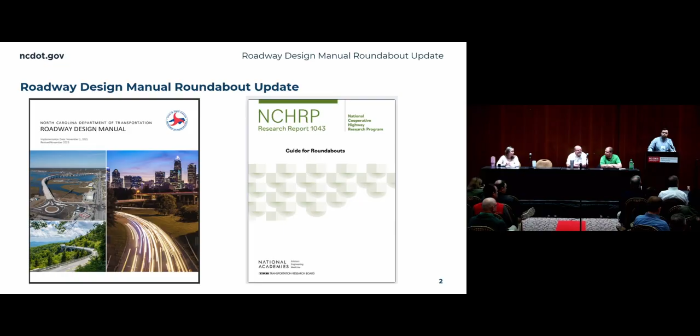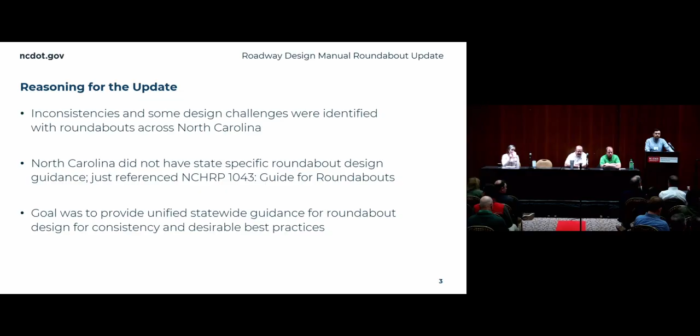That brings us to today, or in February we released the update where we've taken a little bit more guidance and gone a little bit more in depth. So what we've done is identify some challenges from projects throughout the state, as well as coordinated with other states, Wisconsin and Florida being two of them. We used that combined with guidance from 1043 to create the NCDOT roundabout guidance.

So what have we actually added? We've made changes to two sections. The first one, 8.2.4, this is an overview of roundabouts. And we've also made changes to 8.10, which is our design guidance.

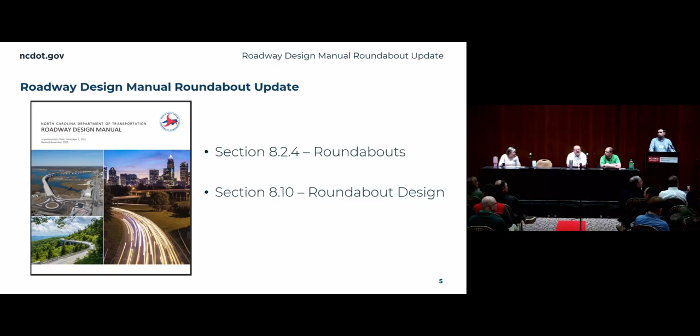So chapter 8.2 is our types of intersections. This gives you an overview of the different types of roundabouts. There are 4 of them. The first one, and kind of our default, is a single lane roundabout. The next one is a mini roundabout. These are going to be rural, typically smaller volumes, smaller speeds, and generally an upgrade from a 4-way stop.

The next one is a multi-lane roundabout. At NCDOT we're highly recommending a 2x1 as the biggest. If you find a location that you think a 2x2 would work, you're more than welcome to talk to congestion, see if you can get that worked out. But due to some challenges we've had with them in the past, we're highly recommending a 2x1.

The final type is a modular roundabout. Modular roundabouts are essentially plastic curbing that's put up very quickly. They're very cheap, very quick to put up. However, they do have some issues with the length of their life.

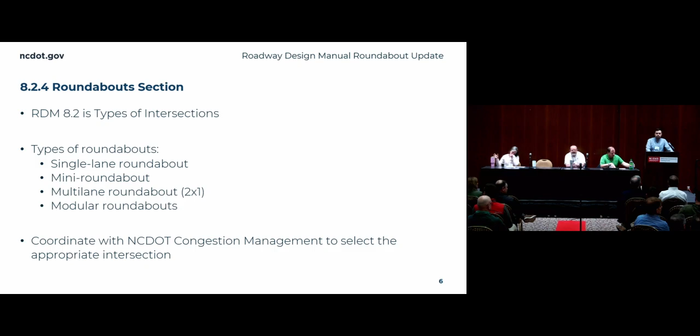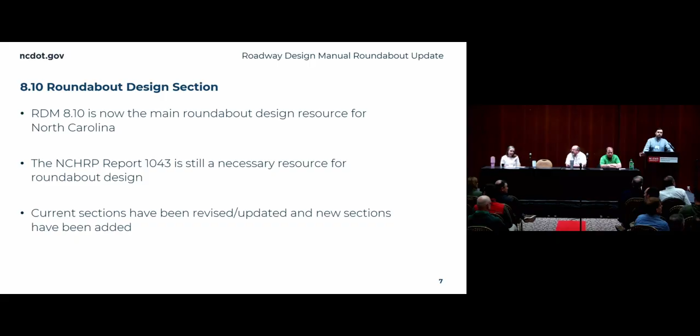So then to get into 8.10, this is our design section. This is not going to be the only design guidance you're going to need for roundabouts. You are still going to have to use the NCHRP report. However, our goal here is to orient designers with what we want you to do with a North Carolina look for it.

To get into that, it's going to start with the roundabout design process. What we mean by this is roundabouts can be optimized for whatever you need them to be. So what we want you to do is pick certain things you can optimize your roundabout for. We have a list of them up on the screen, but that's not all of them. We have speed control, pedestrian and bike accommodations, large design vehicle accommodations, high capacity, and right-of-way impacts. You should look at your project purpose statement, stakeholder input, your location, and any information you have on your project. Try to think about which of these would be most important for that location.

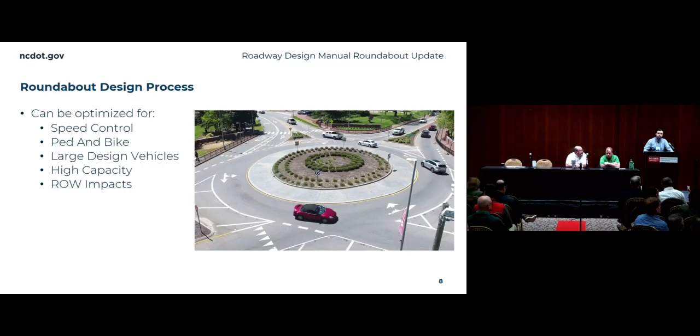Then, as you are making decisions and designing your roundabout, we want you to keep these important things in mind. There are a lot of decisions you can make that will give you benefits on one side and drawbacks on the other. So we want you to try to balance those decisions as you go through the design stages.

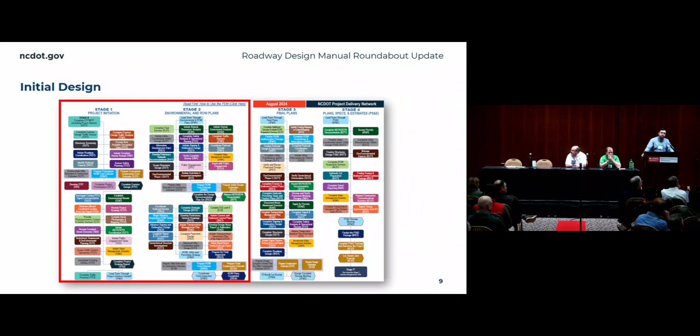Once you have your alignment set up, you need to look at your legs. There are 2 different types of legs: approach legs and departure legs. For your approach legs, we want to make sure we are slowing people down, so this means gradually decreasing radii on curves. And I'm going to say gradually again. We want to make sure we are not just putting a really sharp curve right there coming out of maybe a 60-mile-an-hour road.

Then for departure, we are looking to allow people to accelerate out of our roundabouts. We don't want to be putting chicanes on our departure legs. Something that goes hand in hand with those last 2 is going to be truck aprons. At NCDOT, we want to do our best to minimize truck aprons for pedestrian issues, which we'll talk about a little later, but also for cost.

Then you're going to lay out your bypass lanes, which are your right turn bypass lanes. Once we have all of that set up, we can take a look at our fastest path calculations. For anybody who doesn't know what a fastest path calculation is, essentially this is a line that we draw through a roundabout that represents theoretically the fastest somebody could drive through it.

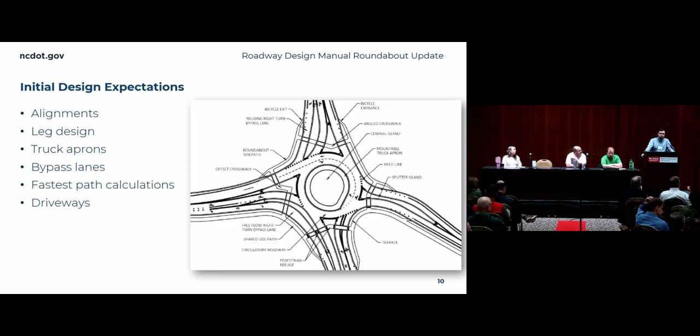Our next and final stage of guidance that we have added is our DRPS expectations. If you take a look at this section, you're going to see the words confirm, review, revise a lot. That is because, as we've said a couple of times now, roundabouts are very iterative. You're going to take what you've done in the first couple of stages, look it over, change it, see what you can improve, see where your weaknesses are, to try to get the best roundabout that you can.

Two things that we're going to add at this stage are sight distance calculations—that's your stopping sight distance as well as your intersection sight distance—and then we're going to add details for our islands.

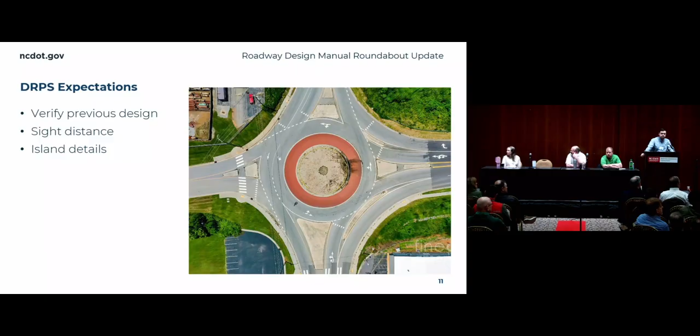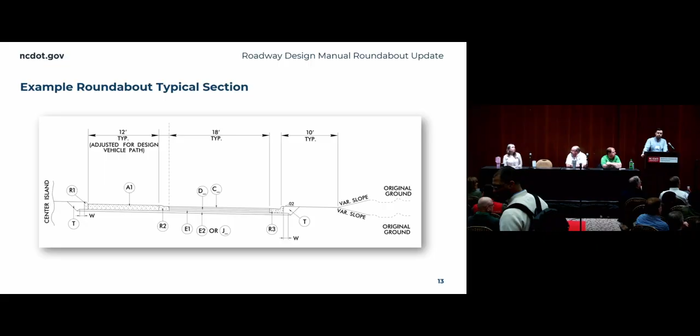Curb and gutter is the NCDOT recommendation for all roundabouts. The reason for this is curb and gutter has inherent speed control compared to just a shoulder and pavement markings. People are much more likely to ignore a line on the pavement than a physical curb barrier, and so for that reason we are recommending it. However, you don't have to put it on your entire corridor—you can put it on just the limits of your roundabout.

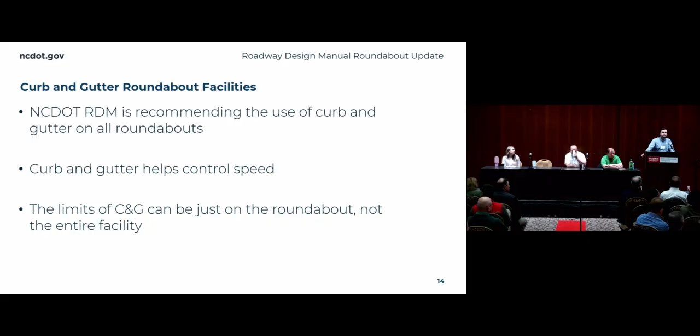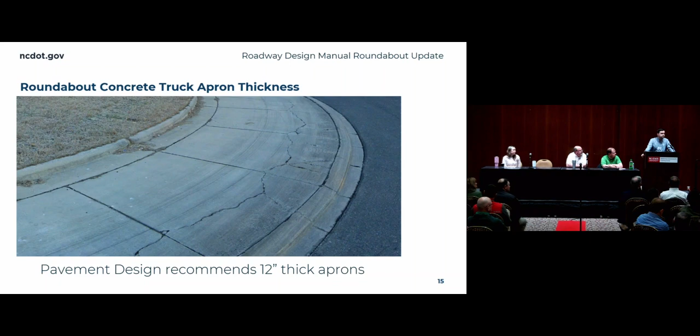So from about 6 months ago up until 6 months ago, truck aprons had been 7 inches to 12 inches in depth. But now pavement design is recommending they be 12 inches due to some of the cracking issues we have seen on truck aprons.

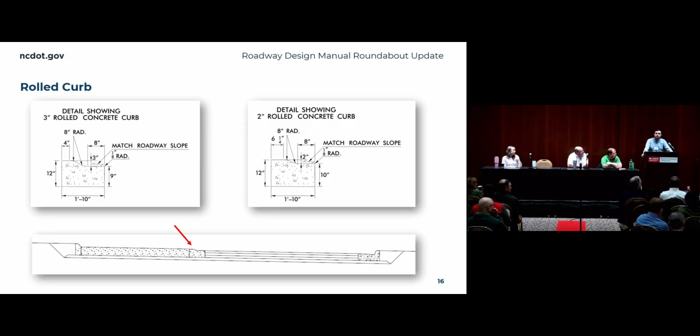We're going to highlight there are 2 types of rolled curb here: a 3-inch rolled curb and a 2-inch rolled curb. The 3-inch is going to be our standard, and the 2-inch is generally going to be used when you have higher low-clearance traffic, something like low boys. The other thing I'll highlight is that the left-hand side of these rolled curbs has that 12 inches to match up with the depth of our truck aprons, and the other side is going to be 9 inches or 10 inches, depending on which one you are using.

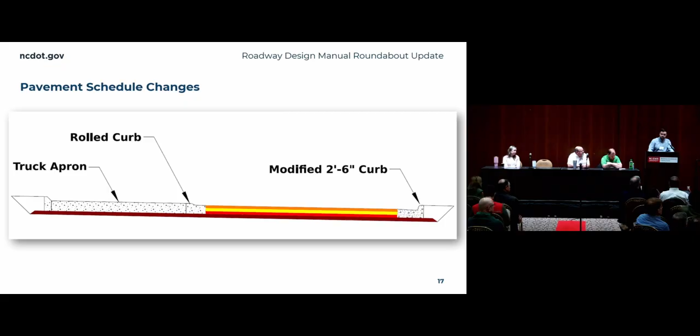Now, as you may have guessed, we have changes to all of our other curbs. So this is our change to our 2'6" curb, going from the 7-inch face to the 9 and 10-inch face.

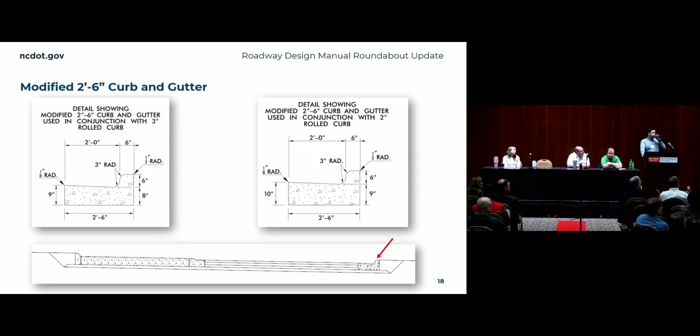So we do not want to run these modified curbs and pavement schedules throughout an entire project. We want to make sure we're stopping them somewhere around the limits of the roundabout. Exactly where you stop that is really case by case. This is a good thing you can coordinate at a field inspection meeting, so talk to your division and construction staff to see where they'd like to end it.

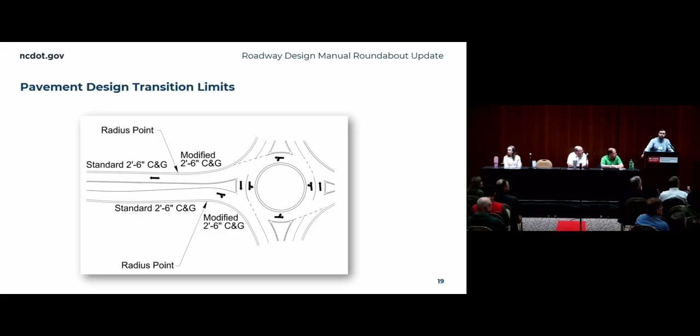And the final typical section thing I'll talk about today is truck aprons. As I said before, there are some pedestrian concerns with truck aprons. If you're a pedestrian, you see a sidewalk and another sidewalk in front of that. So if you as a pedestrian are waiting in the truck apron when a truck approaches, there is a conflict there, and that's something we want to try to mitigate.

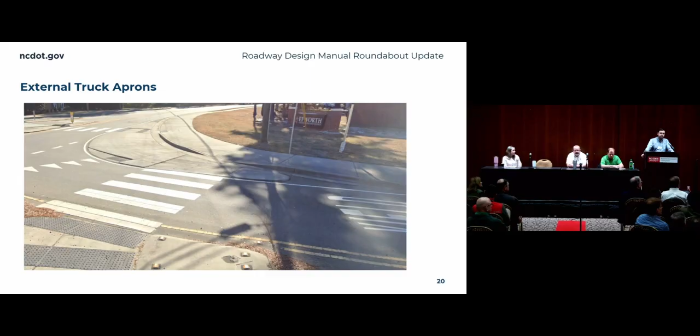One of the easiest ways to do this is to not have these truck aprons at all. They're expensive and they have that issue, so we are trying to do our best to minimize truck aprons. You can take a look at this and mess with your approach legs, and that can generally help you accommodate larger design vehicles. And with that, I'm going to pass you over to Lily to get a little bit more into the design.

All right, so what we have learned through developing this guidance is that designing a roundabout is a bit of an art. You're constantly trying to balance the core design principles, which are balancing speeds, promoting visibility, guiding drivers, and accommodating large vehicles, and then wrapping all of that up together into one design and making it work as a whole.

So for example, having larger entry radii might make your truck movements a little smoother. However, in turn, it will make the operating vehicles enter a little faster, which can create unfavorable scenarios for pedestrians. So you really have to consider the trade-offs behind each decision that you make.

So we've added new subsections to the roadway design manual to help designers understand these fundamental design principles, including the location and shape of the roundabout, vehicle capacity and lanes, speed control, speed consistency and fastest paths, entry angles and vehicle path alignment, and sight distance.

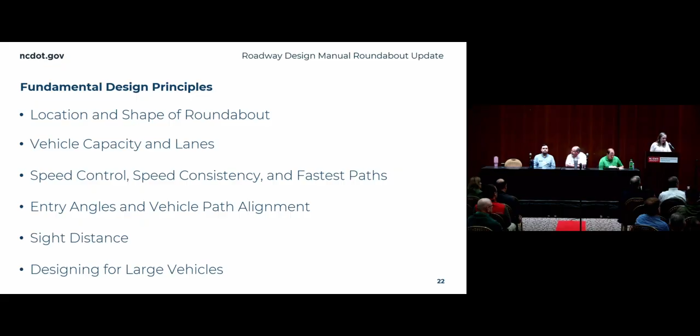And so the designing for large vehicles section also got an overhaul. We removed some information that we felt was best covered by NCHRP 1043, and we have added some additional information about truck aprons based on feedback from pavement management and the divisions. We have also added some information on how to design accordingly for truck-heavy locations.

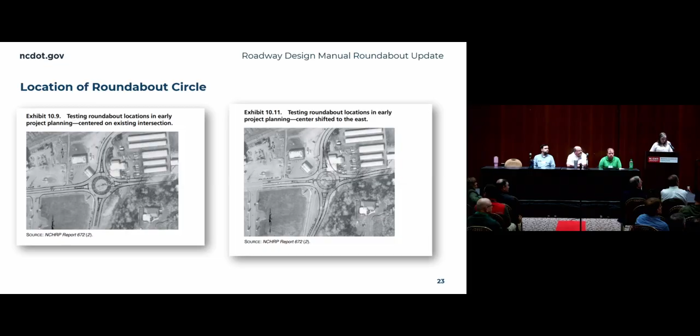So for roundabouts on higher speed facilities, you really want that driver to begin slowing down ahead of time before they reach the circle and then enter and circulate through that roundabout, because otherwise they will be going too fast. Unfortunately, posted speed reductions alone are not effective.

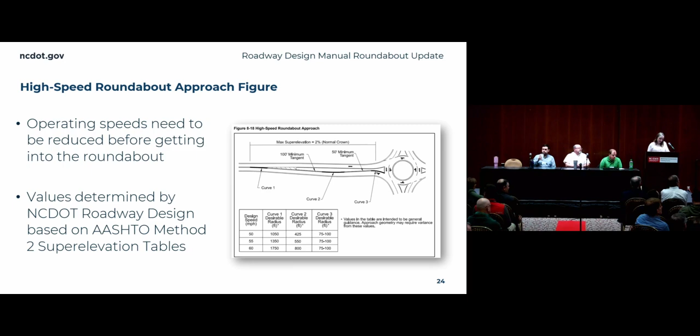So now let's go through an example using this high-speed roundabout approach figure. I'm going to say that my facility entering here has a design speed of 50 miles per hour, and I'll just use the values from the tables here. Let's say I selected my first curve, having a radius of 1,050 feet, and then that 100-foot tangent. Curve 2 would be 425 feet, then a 50-foot tangent, and a selected value of 100 feet for the last one. So you can see on a high level, overall, these radii are getting smaller over time, reducing the speed of that vehicle coming into the roundabout.

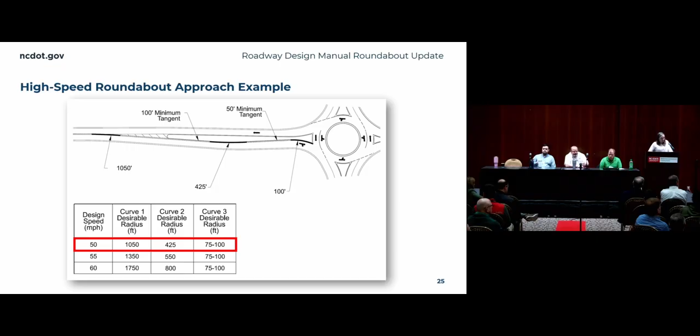We wanted to mention that ultimately this methodology was included as a best practice, so these are recommended values. If your project and conditions dictate that you use something else, that is okay. This example is also for a tangent approach, so curved approaches or other project conditions may lead to different values to achieve that speed control.

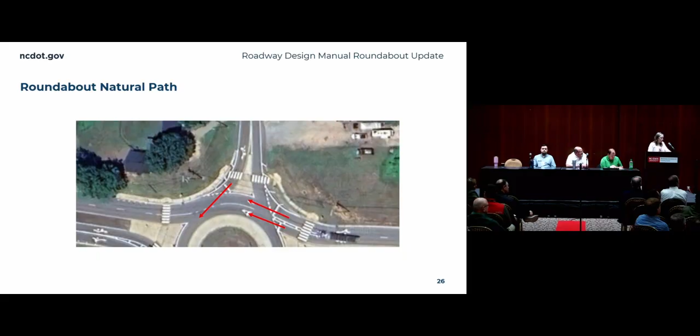From there, you can begin adjusting things like the entry, the splitter islands, or the central island to help how those vehicles are tracking. This is particularly important for 2x1 multi-lane roundabouts, where that correct lane choice needs to be clear early on.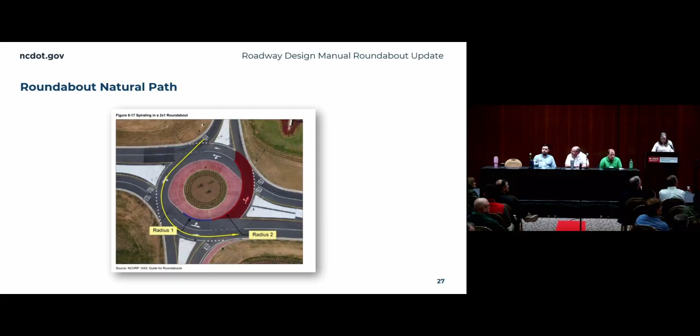Roundabouts require 4 different types of stopping sight distance checks to make sure drivers can see what they need to at different points in the roundabout and stop if necessary. NCHRP report Exhibit 9.12 through 9.16 depict these different checks. You need stopping sight distance on the approach, at right turn bypass lanes, at pedestrian crossings, and around the circulatory roadway. We added references in our guidance to these exhibits to help draw attention to them and how they lay out where on your roundabout and approach legs you actually need to calculate that stopping sight distance from.

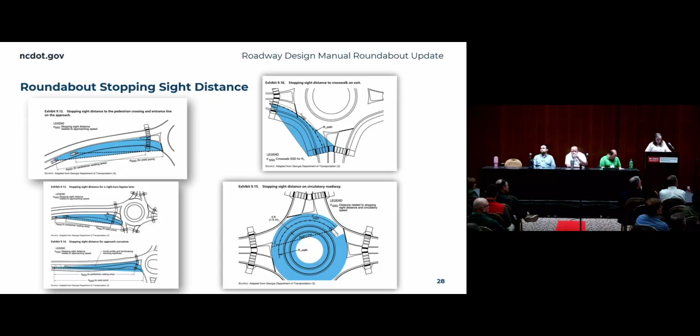After talking through those 4 stopping sight distance checks, let's talk about our intersection sight distance checks. There's only one figure for those, shown here, Exhibit 9.17, which tells you that intersection sight distance needs to be calculated both at the yield line as well as 50 feet ahead, so that drivers are not waiting until the last second to see the circulating traffic.

We also added a reference to this exhibit in our roundabout guidance to draw attention to this figure and the associated formulas.

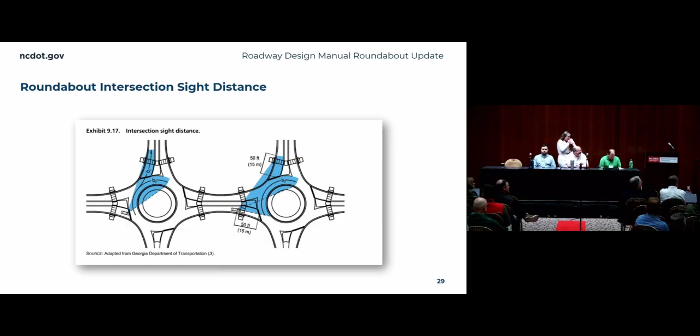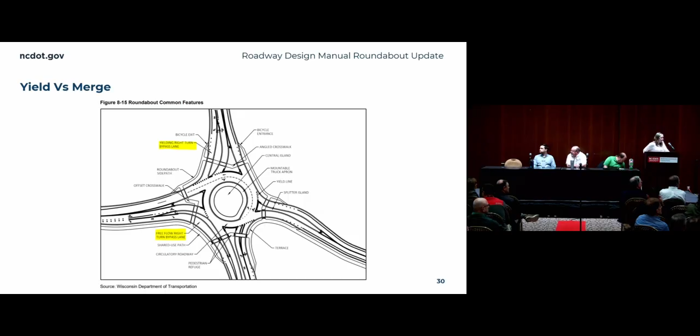If you would like to have a merging bypass lane, it's critical to ensure you have enough side-by-side parallel length for the driver to merge comfortably.

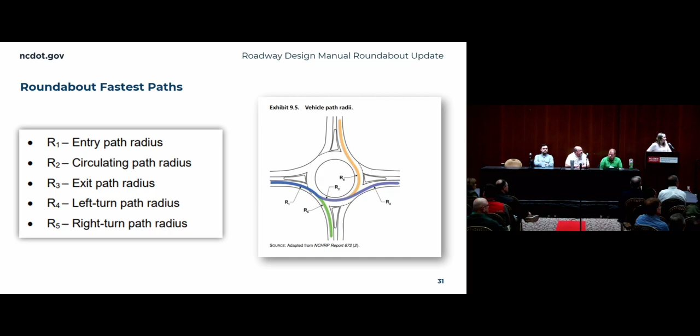Unlike a yield or merge condition, where the driver may be stopping or slowed before entering the roundabout, drivers who can enter freely can bring a lot of speed into that roundabout if the geometry allows it. This is why fastest path is so important. As mentioned earlier, fastest path is just a computed version of each movement, the fastest theoretical speed a driver is able to go. One important concept is that you're checking each movement not just to ensure speeds aren't too high, but also consistent among each other. This takes multiple iterations to get right, but it's a very critical element of roundabout design.

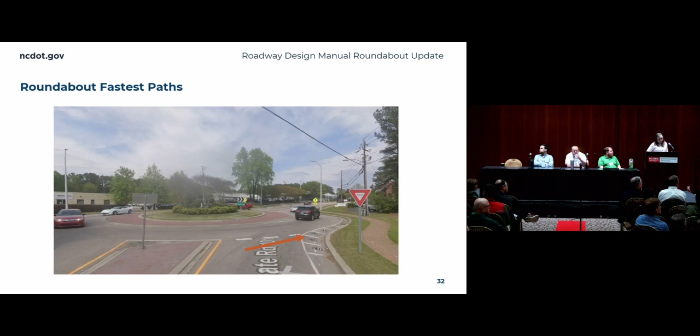The roundabout drainage guidance was updated to be in line with current NCDOT hydraulic guidance. Since roundabouts are lower speed environments, your spread and hydroplaning concerns aren't going to be as bad. Your drainage still needs to work well, however, be careful of over-design. A big point in the roundabout drainage guidance is to keep those drainage structures off the vehicle path, especially on the inside of the roundabout.

The better place for inlets is usually along the outside curb of the approach leg before the driver reaches the yield line. This is also a good place for coordination. If you're the roadway designer, you may do the geometry, get the drainage design back from hydro, and see a box show up right where the driver is going to drive over it. That doesn't automatically mean anything was done wrong, and sometimes you just can't avoid it. But it's still worth working with hydro to see if the geometry can be adjusted enough to get that structure out of the vehicle path.

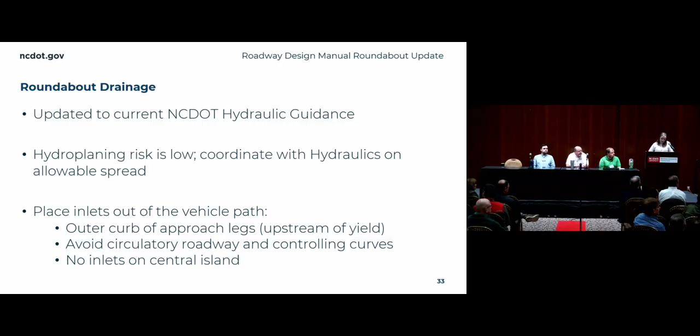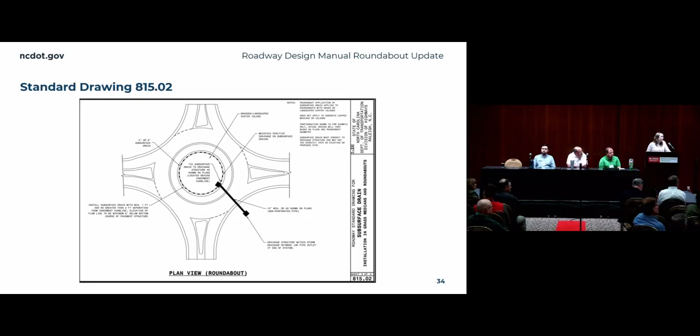Here's standard drawing 815.02, the subsurface drain for installation in grass medians and roundabouts, which was added to the 2024 standard drawings. This is the standard to look at when you have a roundabout with a grass central island that needs drainage. The main benefit of using this is to make sure you're keeping the center of that roundabout draining well and not creating a big muddy maintenance issue.

Usually your interior truck apron is enough to accommodate trucks in a roundabout. But in higher truck locations, like an interchange roundabout with a nearby truck stop, exterior truck aprons may also be needed. This is something designers are running into more often as roundabout interchanges become more common. Truck aprons and geometry adjustments help make room for larger vehicles while still keeping the roundabout doing what it's supposed to. Accommodation should always be based on the design vehicle for your project. There are many different large vehicles with different swept paths and design considerations that need to be focused on specifically.

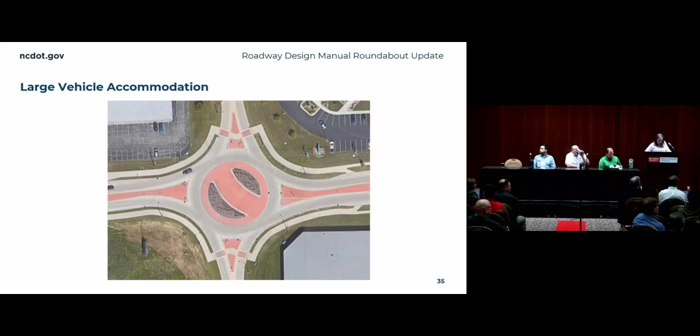The Roadway Design Manual is a living document, typically updated every May and November, and in this case, February for the roundabout version. This was the first enhanced NCDOT specific roundabout guidance, and we have more roundabout specific updates expected in May. So if you have any feedback, lessons learned, or general experience working with roundabouts, please reach out to us and share. It would help us a lot as we continue to develop this with the industry's help. We would love to help review and consider your feedback into future updates.

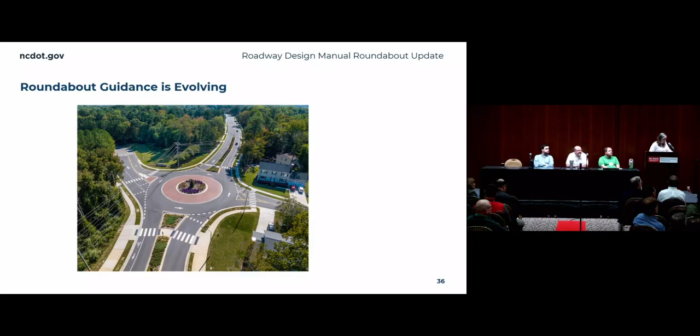Any comments you have for the Roadway Design Manual can be submitted using the contact form on the Roadway Design Manual website shown here.

Good morning, everyone. My name's Ken Thornwell. I'm the State Work Zone Engineer for the North Carolina DOT, and I'm going to chat a little bit more about roundabouts from a phasing and constructability perspective. I'll talk about some of the challenges we have when they go to construction. Then I'm going to change gears and give some updates on positive protection in work zones. I'll focus heavier on portable concrete barrier, but touch on the updated Code of Federal Regulations that was passed last year, and wrap it up with some information on crash cushions.

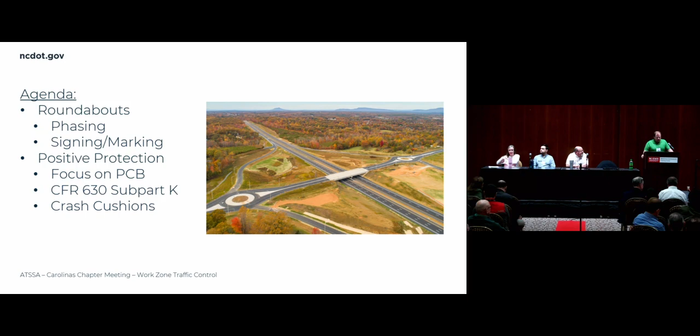But anyway, going into the roundabout construction. When we go to build a roundabout, traffic control really becomes the name of the game. Throughout construction, we have to keep people pointed in the right direction. Patterns change. Users, whether bicycles, vehicles, trucks, or pedestrians, we have to change their paths during construction. The goal is to keep them comfortable getting from one phase to the next until that permanent pattern is complete.

Some of the big challenges when we go to construct them: number one, alignments. The alignments will change during construction, probably more than once. The lane shifts and tapers need to be designed in accordance with MUTCD and North Carolina DOT standards, giving drivers great channelization with our drums, cones, and skinny drums so they understand which way we want them to go.

The superelevations, I heard Lily and Ty talk about superelevations. Superelevations in work zone traffic control cause us headaches a lot of times because it seems like every single time there's a superelevation to the left, the permanent design wants a superelevation to the right. Doesn't sound like a big deal, but it can be hard to construct. So as we're wedging that pavement, or milling, or whatever needs to happen, we need to make sure we're maintaining positive drainage, not getting bird bath conditions during that construction period, and that our design speeds are acceptable as folks come into these changed superelevations.

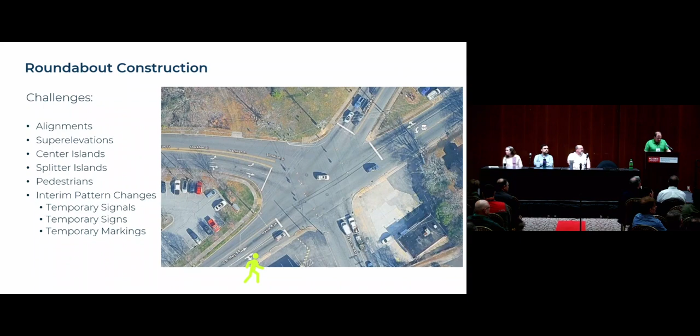As we go through construction, we've got a signal at this intersection here. At some point when it becomes a roundabout, that signal needs to come out. But in the interim pattern, while we're building that roundabout, that signal is very much in the way. So we need to build a temporary signal to get the poles and span wires out of the way so roundabout construction can continue.

So same intersection here. This is the public hearing map for that intersection, and that just makes my brain hurt. From a traffic control perspective, where do you even begin? What do we build first?

You can see that there's a lot of construction happening outside of the existing pavement. So what do you build first? Where do you put things like your temporary signal poles? Where are you going to put the pedestrians during construction?

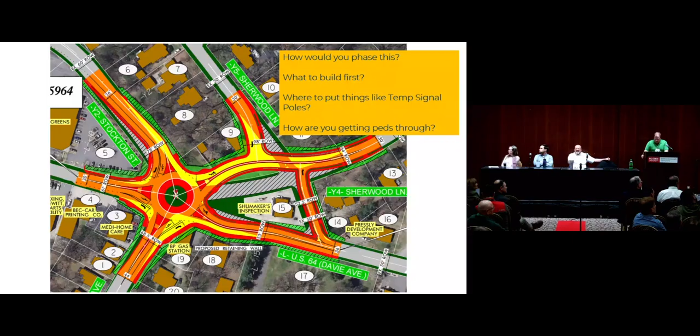These are the kinds of things that we need to include on temporary traffic control plans, because these are the things that are going to make it easier for the pedestrians to get through, for our bicyclists to get through, and then for our contractors to know what they need to build and at what point during construction they need to be installed.

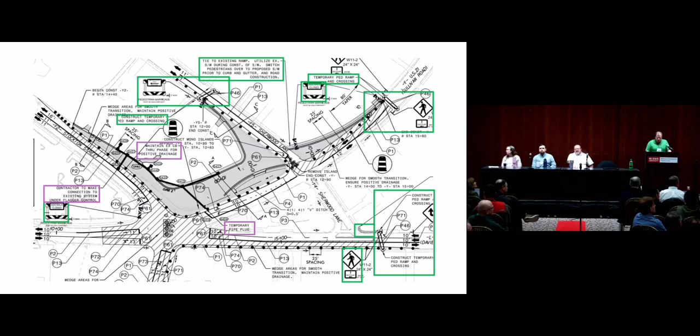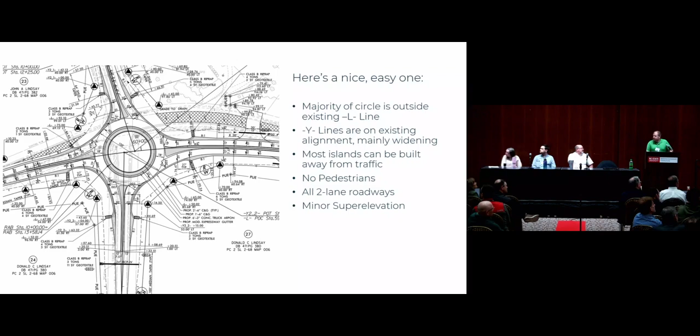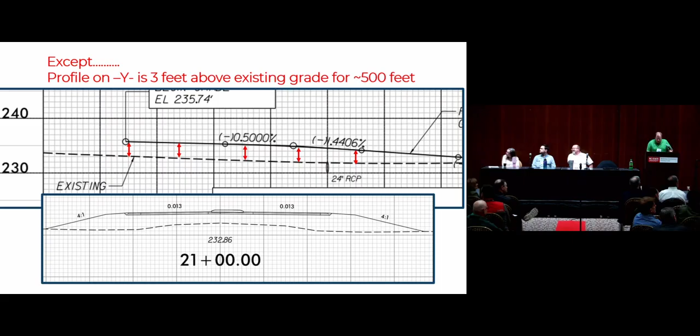The Y lines are pretty much on the same alignment. The islands can be built away from traffic. There's no pedestrians out here, 2-lane roads, minor superelevation changes. Everything looks wonderful until I pull up the profile, and it's 3 feet in the air for 500 feet. Hey, it's better than cut.

So the only way to build that approach on the bottom there was under full closure. The challenge we have there is that full closures - this one in particular - was not identified very early in the plans. It was identified a little bit later, so we didn't have quite as much time to do all the things we have to do for a detour, right? Work zone traffic control, I fully support closing every single road as much as possible to do the construction. We'll talk about that when we get into positive protection.

But we do have to do some things before we just close the road. We need to analyze the traffic routes and the detours, make sure that the detour route can handle the additional traffic volumes, that we're not going to have issues at traffic signals or railroad crossings, low bridges, weight-restricted bridges, making sure the pavement surface along that detour route can actually handle the traffic, make sure we don't have to do any widening for turns or anything like that. So there is a little bit of analysis that has to be done on that detour route. It's not as simple as just close the road and send the cars around.

Even if the roads themselves and the intersections are okay, we still have to coordinate with our stakeholders. We have to check with our division folks to make sure they're comfortable with it - our emergency services, schools, local governments, utilities. Just had one come in the other day where we were possibly proposing a closure, and Duke Energy said, well, hold on now, I need to get my giant trucks in and out because this is a staging yard where we keep all of our telephone poles. So I don't even know what design vehicle that would be, but it's a very, very big one.

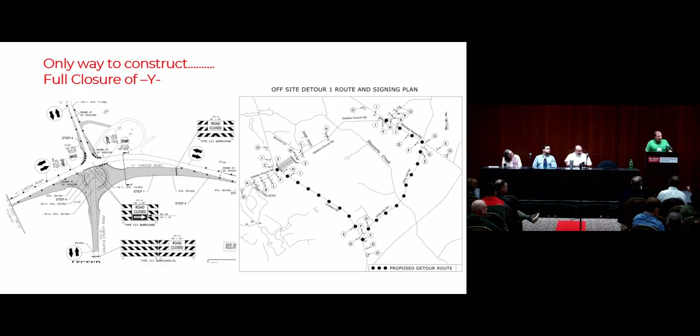And then once it actually goes to construction, we need to make sure that the plans have everything they need, because when that road gets closed, if we need to make changes because signs weren't included or we didn't have what we needed in the plans, sign fabrication could take several days, sometimes even weeks. So if we need to make a change, it might be a week before that change is actually implemented in the field. So all of that to say, if we're going to close the road to build the roundabout, fully support it - just make sure that we plan it accordingly.

Other things during roundabouts: interim pattern changes. So when we build a roundabout, a lot of times we have to work on multiple legs of the intersection at the same time. Sometimes that means that we can't keep every lane open that's out there today. So if we have to do turn lane closures or through lane closures, we just need to make sure that we're mitigating those impacts.

The situation here, I think part of it was the roundabout construction, part of it may have been some drainage items that they were trying to install, but we ended up having to close a through lane for a long duration, and immediately, the very next day, 2 miles of queuing, and every single day after that, 2 miles of queuing. So this is another situation where, with some level of traffic analysis, if we could have identified this earlier in the plans, we may have been able to put some intermediate contract times on this to make sure that the contractor gets these items completed quickly.

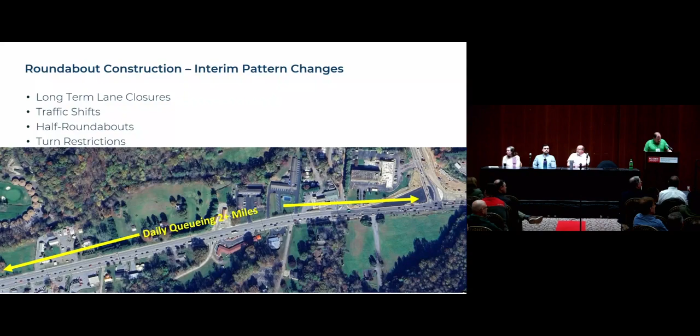Again, it just kind of boils down to making sure that we have the signings and markings in place to make sure that drivers understand what we expect them to do.

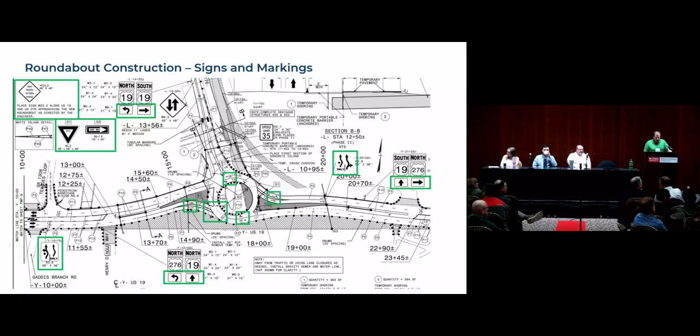So if the permanent sign can't go in, then we need to show that sign as a temporary sign on the traffic control plan, so that way the traffic control contractor can order those signs and have them installed on temporary supports.

All right, so I'm going to change gears a little bit. I'm going to go into some positive protection stuff.

So positive protection, basically any device that we put on the road to redirect vehicles and keep them from running off the road, hitting workers, running into a ditch, hitting a bridge pier, whatever the case may be. The most common, the most well-known are probably portable concrete barrier - that's what we see on most of our major projects. And then also truck-mounted attenuators.

A couple of things that we had to do, and I'll get into this in a minute, but some key definitions here: high anticipated operating speed - North Carolina DOT defines that as 45 miles per hour. And then no means of escape - so when workers have no means of escape, that means that they do not have an unimpeded path at all times. So these are going to become important in just a minute.

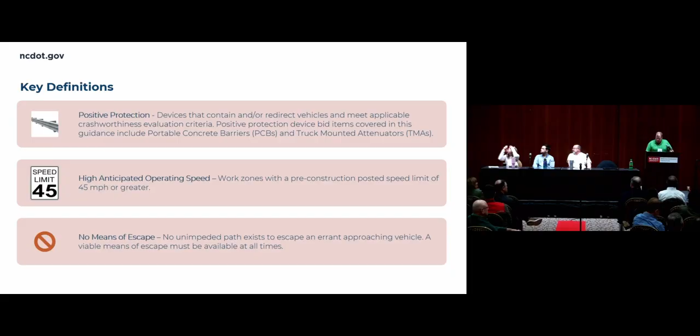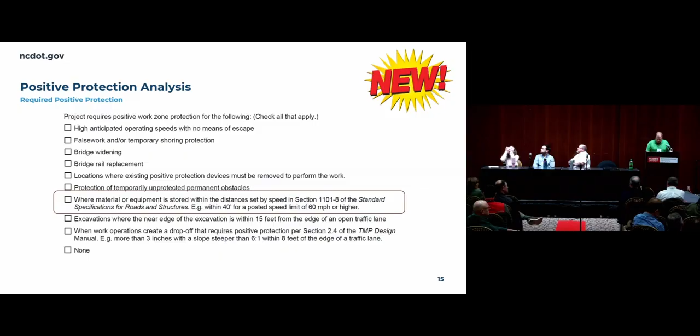So as part of this update to the Code of Federal Regulations final rule, we have a positive protection analysis guide that we'll be issuing some training on later this spring. There's a whole list of items in there for when positive protection may be used. But the big thing I like to say is yes, positive protection.

When a vehicle strikes positive protection, the benefit is that it's a controlled collision. Positive protection devices are crash tested. They're deemed as safe, or majorly safe, I don't know how to say that.

But the problem, or the risk, is that when we put concrete barrier down in 70 miles of I-95, we are going to increase crash frequency. That is a known fact. When crashes occur, it's going to take longer for tow trucks, police cars, and ambulances to get there. It's going to increase the likelihood of a secondary crash.

Positive protection is also going to cause issues with drainage, sight distance, it restricts oversized loads, reduces access for the contractor to get in and out of the work area. And there is tremendous worker exposure to install and remove it, especially if it's anchored.

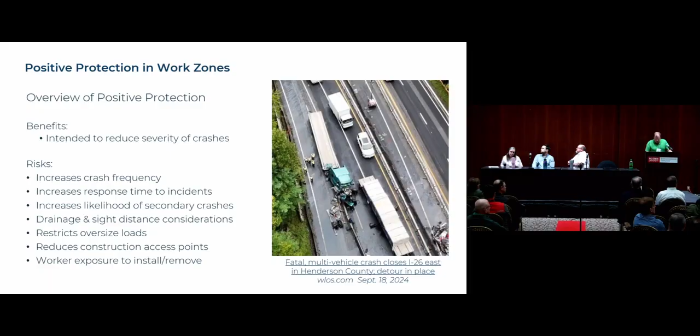So the soapbox that I like to carry around with me is: yes, positive protection reduces the severity of crashes, but it does have the potential to kill people itself. So the big takeaway here is that we want to minimize the use of positive protection, either by getting the traffic away from the work or getting the work away from the traffic. That's the message I like to take home - if there's an opportunity to not use positive protection, let's not. If we have to, then we will.

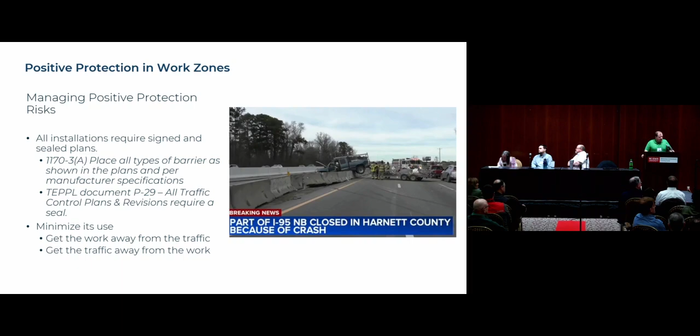Basically, the long and short of it is that if those three things are true - high operating speed, which we have defined as 45 miles per hour, workers have no means of escape, and it is a federal aid project - if those three conditions are true, Federal Highway says that you shall use positive protection unless you do an engineering study to eliminate it.

It sounds like a big change, but in reality it's not. I can't think of a single project in the state of North Carolina right now that would require positive protection based on this rule that doesn't already have it. So we're doing a great job there.

The big change, though, is that if you choose not to use positive protection for whatever reason, the federal requirement now does require an engineering study. So there's actually like a 10-page engineering form that has to be filled out, and somebody's got to sign and seal it and include it in project documentation.

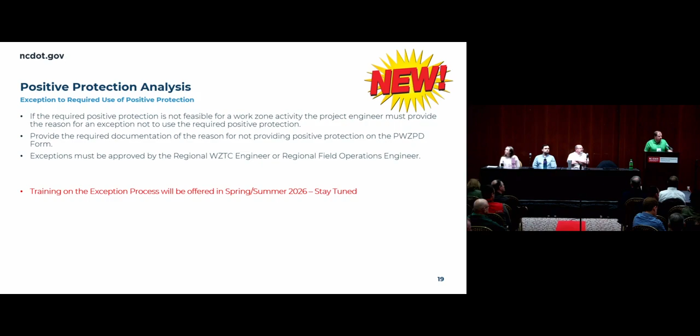Like I said, we're going to start offering some trainings on this coming later this spring and summer. I anticipate that this will occur on 2 or 3 projects in the state per year at most. This is not a huge thing for us because, as I mentioned, we already do a great job including positive protection on the projects that need it.

All right, moving along. Portable concrete barrier is, as I mentioned, the most common one we use in North Carolina, with deflections between 1 to 4 feet. The big difference I wanted to talk through is between NCHRP 350 and MASH 16 - they are two different types of barrier. Unfortunately, we can't control which one the contractor brings to the site, so I'm going to walk through some of the differences between them.

NCHRP 350 - contractors are allowed to continue using it if they have it in their inventory, however they're no longer allowed to manufacture it. So as we move forward in time, we will start seeing less and less of the 350 barrier, and more and more of the MASH 16 barrier. But one of the big differences is that the MASH 16 barrier actually has to be anchored on the ends. Even if you have unanchored barrier shown in your plans, the ends of it still have to be anchored into the pavement.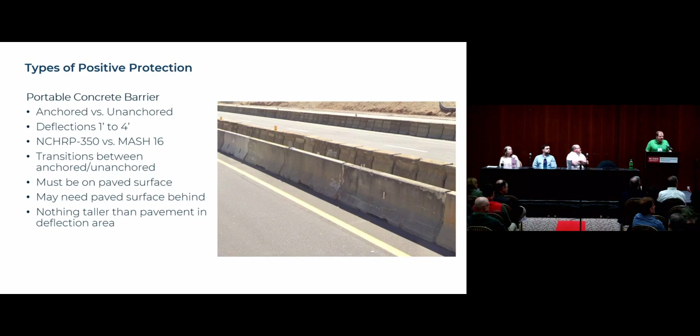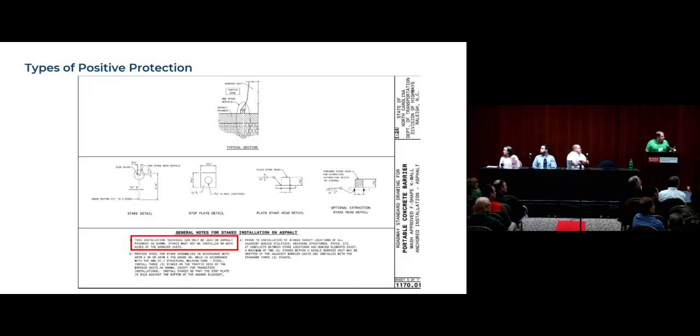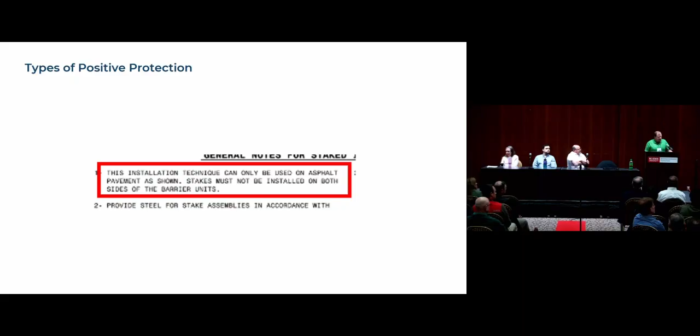This is a new standard drawing that went into the 2024 specs. I put it in the red box because this is causing a little bit of heartburn for us: MASH 16 barrier can only be anchored on the traffic side. We cannot put pins on both sides of MASH 16 barrier. So if we're running concrete barrier down the middle of a bridge or facility with traffic on both sides, we pretty much can't use anchored barrier - it's got to be unanchored barrier. That's a change we're working through.

Next, this is the anchorage I was talking about. On MASH 16 barrier, there's a special provision now that goes into all projects by default when you have concrete barrier. Basically, it says that if you have concrete barrier, you can only be anchored on the traffic side.

What you see here on the right side of that standard drawing is the crash cushion, and as traffic moves past it, the first two pieces of barrier have 3 anchors apiece, then 2 anchors, then 1 anchor. So we had to figure out how to pay contractors for this, since they actually have to go out and drill holes in the pavement and hammer anchors down. The way this standard special provision works is that if it's a transition from a crash cushion to unanchored PCB, that transition is incidental - we are not paying for it. That's just part of the crash cushion.

But this transition requirement is also required when going from unanchored barrier to anchored barrier. Think about if you're running down the road with unanchored barrier, going underneath a bridge, and under the bridge we need anchored barrier - we will need this transition on both sides. The way this is measured and paid is it's all counted as anchored barrier. As soon as that transition starts, the contractor gets paid for anchored, and once they get under the bridge, out the other side, and transition back down, that's where the anchored barrier pay item ends.

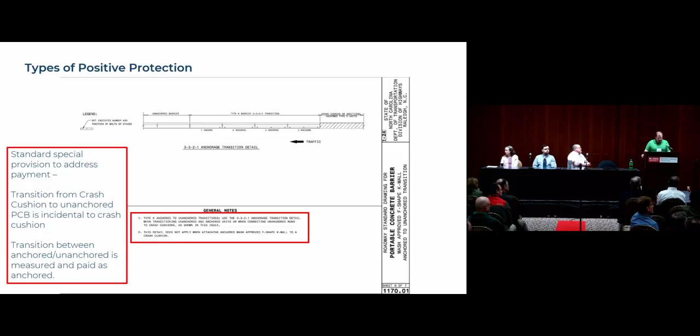Transitions between guardrails and concrete barrier - we see it all the time. Contractors love to just tuck concrete barrier behind guardrail, cutting the guardrail off and tucking it behind. Ideally we don't want them to do that, because what we're trying to do is maintain system tension. Ideally, we want that guardrail unit to be tied to the end of the concrete barrier.

Preference number one is the BR-77 connection. If that doesn't work, we do have a standard drawing in the book that gives guidance on how you can transition from a guardrail section to a barrier section. Keep that in mind as you're designing it - we can't just put crash cushions right in front of guardrails. We either need the guardrail in front of the barrier, tucked about 3 feet behind it. There's also a requirement for some temporary pavement to make sure that barrier isn't sitting in the dirt.

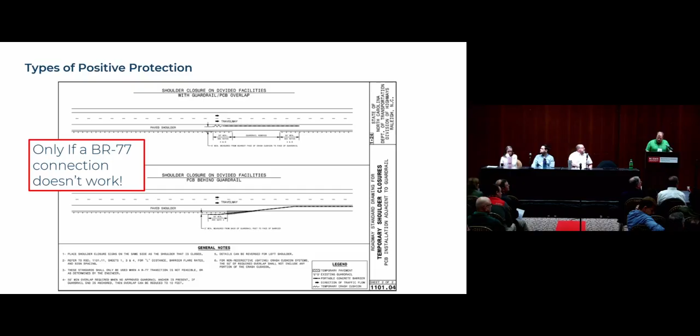All right, let's see here - temporary crash cushions. Some of you may have already gotten it; this memo actually went out this morning.

Effective with the May turn-ins. So that means in about 40 days.

If you need to use a non-gating crash cushion, we need to call that out in the plans. If you're familiar with gating or non-gating crash cushions, gating crash cushions are the water-filled crash cushions you're starting to see on the interstates a little more.

They're just as good. They will slow a vehicle down and provide controlled deceleration, but if struck on an angle, there's potential for a vehicle to penetrate through it and end up behind the barrier. As long as your barrier length of need is correct, and you're not in front of a deep ditch or have fixed objects behind that crash cushion, it shouldn't be a problem. If those conditions aren't met and a vehicle running through the crash cushion would cause a problem, then we need to call it out as a non-gating crash cushion.

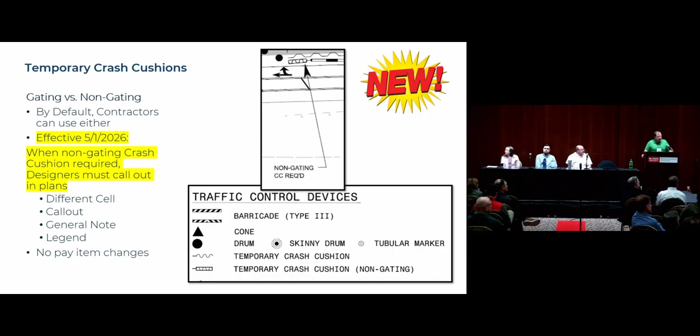There's going to be a different cell in the cell library. We're going to ask that you call it out on the plan with a note as shown. But that's pretty much it - no changes to pay items. Again, this is handled in special provisions, which are added by central contracts.

Moving on, water-filled barrier - the other soapbox I always carry in my back pocket. If I see water-filled barrier on a plan, it is an immediate red flag for me.

Yeah, there's my note at the bottom. If you can make water-filled barrier work, you can also make concrete barrier work. Concrete barrier is half the price of water-filled barrier, and concrete barrier's minimum length is less than water-filled.

Water-filled barrier is a favorite item of contractors for some reason, but in my opinion it's nothing more than a channelizing device, because the minimum lengths are very, very long and the deflections are very high. A lot of them, especially the initial lengths, are gating systems, so if a vehicle strikes it, there's a high chance of penetration. And if you're using them in wintertime, we've got to put antifreeze or salt in it.

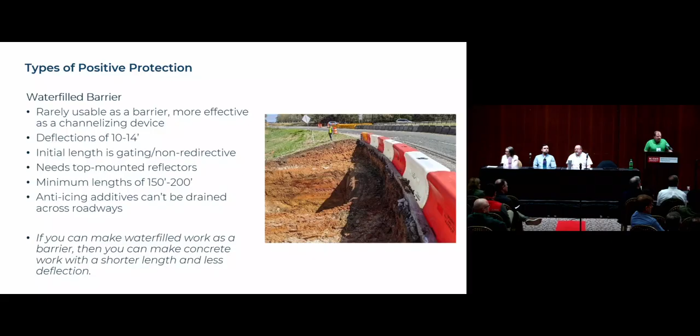Depending on what the contractor uses, we can't intentionally drain it across the pavement - you actually have to get a vac truck and suck the antifreeze back out of it. So like I said, if you can make water-filled barrier work in your design, I think you could also make concrete barrier work, and it's cheaper and easier to install.

Lastly, we get a lot of questions about steel barrier, similar to PCB. We've gotten questions in the past about whether we're going to make this a standard, put it in the spec book, or have standard drawings for it. The answer to all of those questions is no, and the reason is because they're all proprietary designs - they're all a little bit different.

So typically what we're doing is allowing contractors to submit RFIs during construction to say, hey, I want to use steel instead of concrete. If that's what they want to do, and you're in the construction unit, just send those to us. We'll review them and take a look.

But some of the challenges with it is it does have a slightly wider footprint - about 4 or 5 inches wider than concrete. It requires anchoring along its entire length, like every 16 feet or so, and it's got a very, very large curve radius. But the contractors love it.

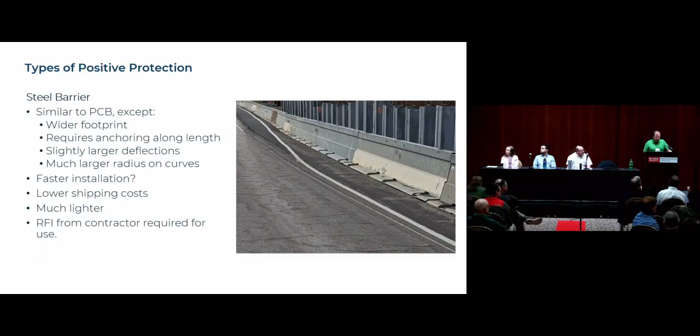But yeah, it's much lighter with lower shipping costs. If you guys get questions from folks in the field - I think we've called it out on one project, a drawbridge project down in Wilmington - but otherwise, when we use positive protection, we're just going to call out the concrete guardrail, one of our standard items. But that's all I have.